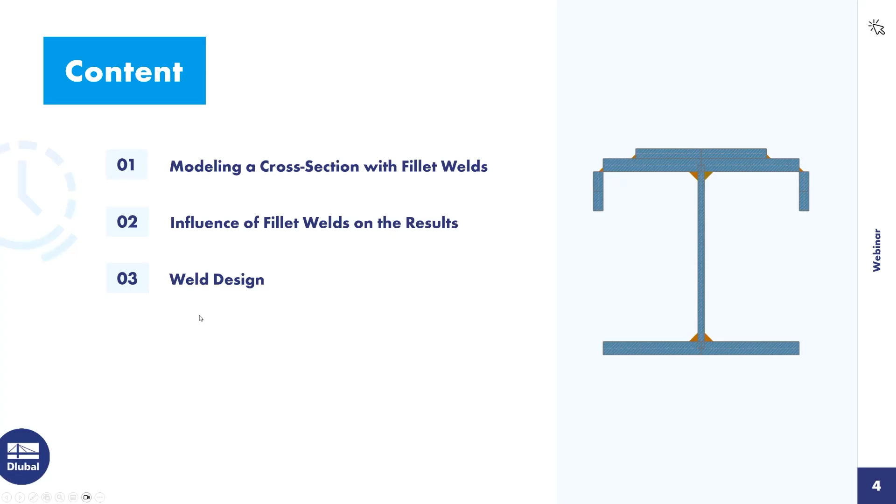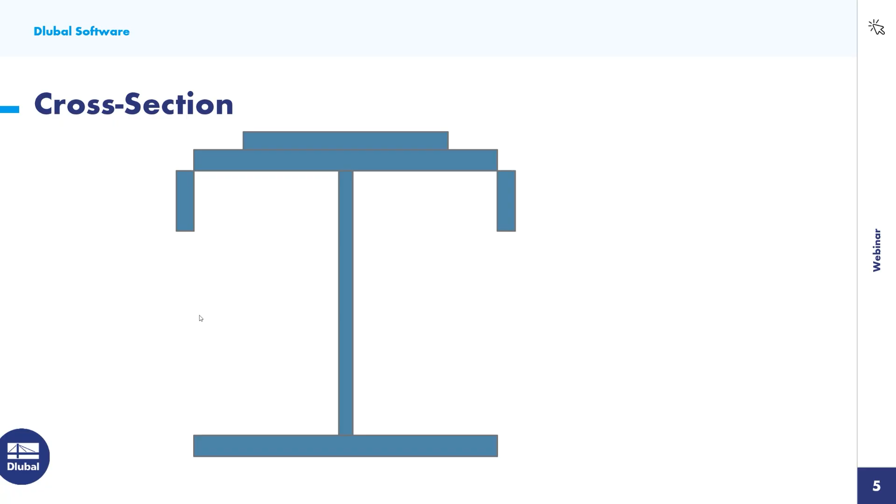The presented cross-section featuring a welded reinforcement and welded lips on the top flange will be modeled in RSECTION. During this process, the types of fillet welds available in the program will be introduced. The throat welds are modeled using a standard fillet weld. The connection between the reinforcement plate and the flange is created using a lap fillet weld, while the lips are attached to the flanges via corner fillet welds.

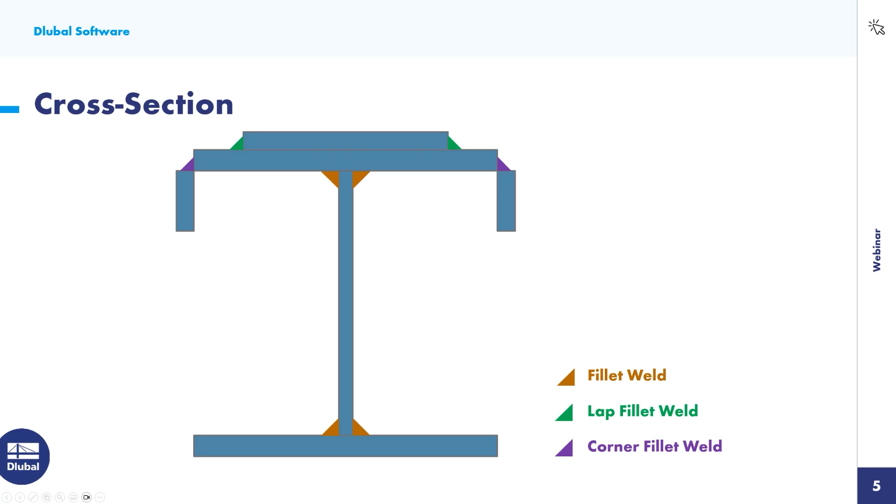To begin, I create a new file in RSECTION. I name this file example1. Since weld stresses can only be calculated using the analysis method thin-wall analysis, I select this option. For the material, I choose steel S235. This material is already inserted in this file, but if you would need another material, you can choose this from the material library.

I insert the cross-section to be modeled from the cross-section library. I use the section type parametric thin walls since this section type allows me to define the parameters of the cross-section manually. For the welded cross-section, I choose also the manufacturing type welded. I then define the dimensions of the cross-section. The height is 300 millimeter, width is 300 millimeter. The thickness of the web is 10 millimeter. The thickness of the flanges is 20 millimeter.

At this point, welds could already be defined, but I deliberately postpone the step in order to demonstrate later how to create welds and what settings must be considered. When inserting the cross-section, I disassemble it into its individual components to allow for further editing. To ensure that the force transfer occurs exclusively via the weld and not through adjacent elements, a separation joint must be defined on the welded element. Let me explain this in more detail.

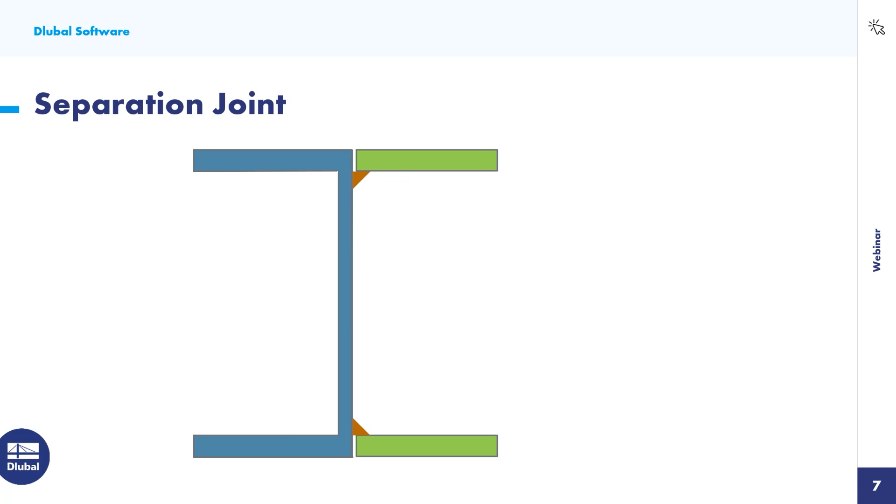In this example, the web is welded to both the top and bottom flanges. In this case, the web is considered the welded element. Therefore, separation joints must be applied at both the beginning and end of the web, in other words, at its connections to the flanges. If, on the other hand, the two right-hand flanges were to be welded to an existing section, the separation joints would need to be defined on the flanges, as they would then be the welded parts. The separation joint is defined directly within the corresponding element.

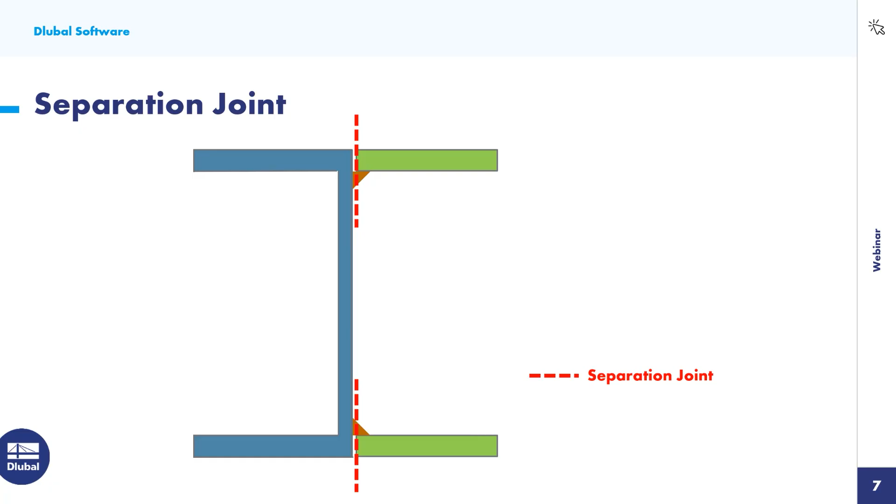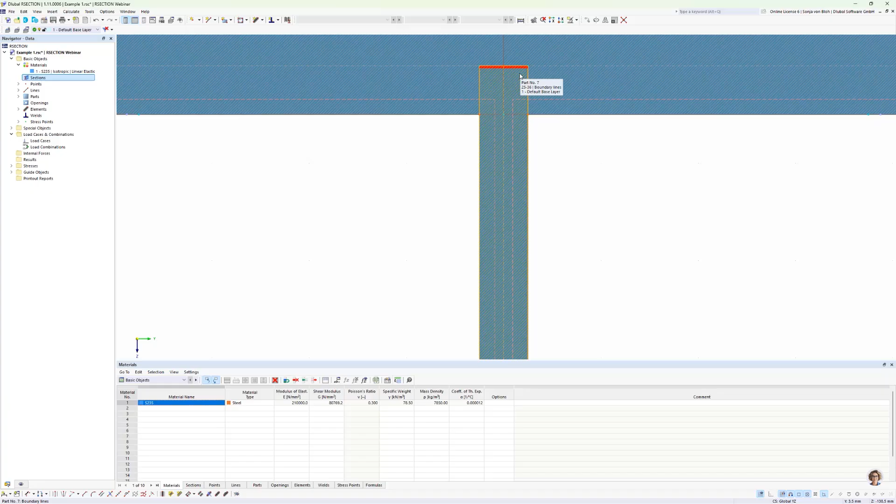In this case, I open the Edit dialog of the web, and here I define the separation joint on start and end of the element. For verification, the separation joint is also shown graphically in the model.

Next, I define the fillet welds. For this, I use the weld type fillet weld. First, I define the throat thickness. This should be 10 millimeter. Then I select the elements to be connected by the welds. These are the upper flanges to the web and the lower flanges to the web.

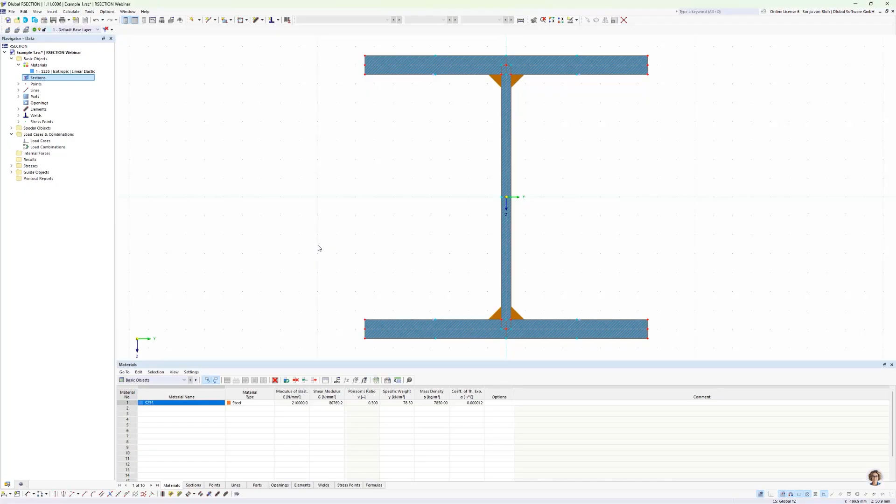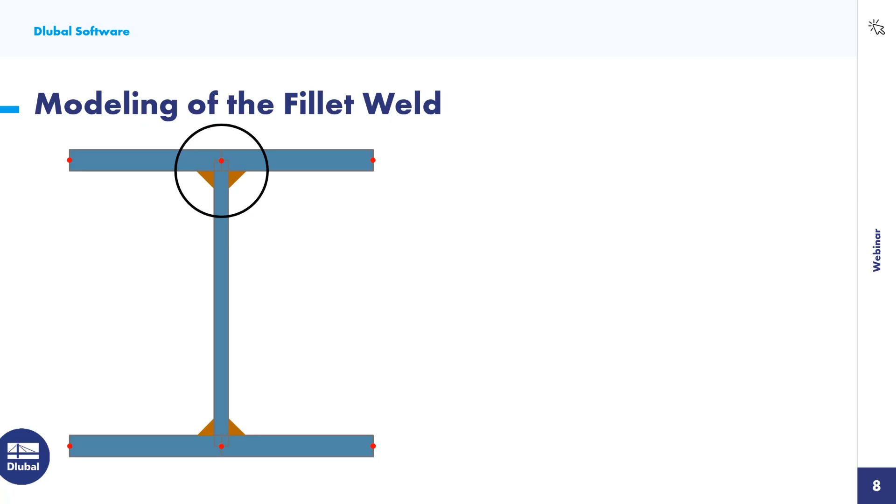The connection between the flange and the web is made via the fillet welds. I would now like to show in detail how these welds are represented. To do this, I examine the connection between the web and the top flange. The previously defined separation joint on the web ensures that there is no direct connection between the web and flange. Force transmission takes place exclusively through the welds.

The program generates the connection elements shown in green, which represent the fillet weld. This configuration results in a closed cell, which leads to a Bredt torsional moment of inertia being taken into account in the cross-section properties. The welds have a noticeable effect on the stress distribution.

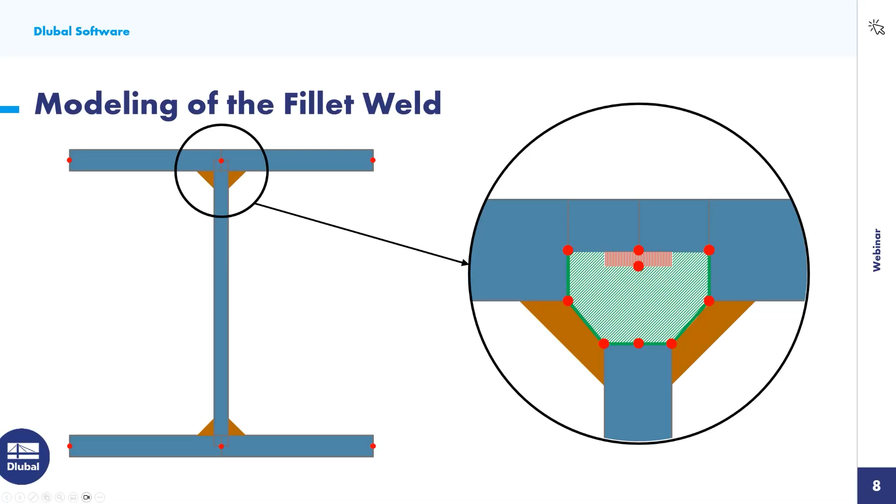For comparison, I create an additional file with identical cross-section but without welds. I name this file example2. I choose here once again the analysis method, thin-wall analysis. I use the material S235 and I define the I section with the help of the cross-section library.

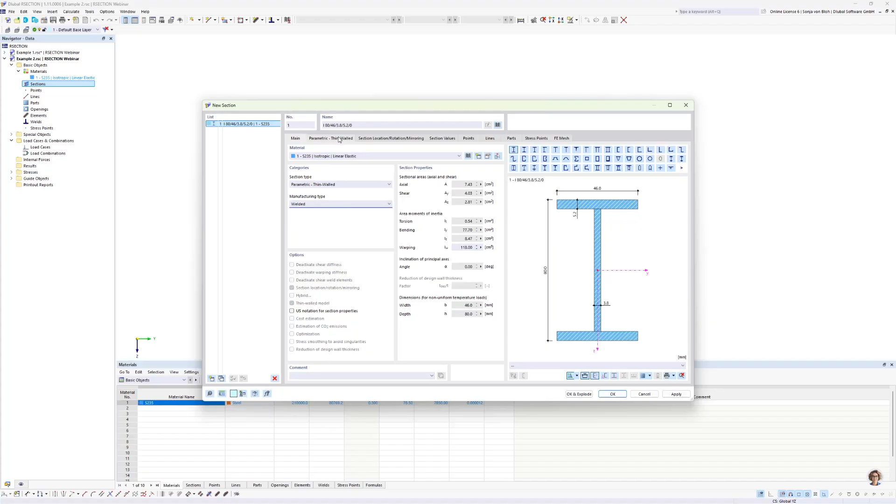Here I choose the section type parametric thin-walled, the manufacturing type welded, and I define the dimensions of the cross-section: height 300 millimeter, width 300 millimeter, thickness of the web 10 millimeter, thickness of the flanges 20 millimeter. I insert the cross-section with OK and explode.

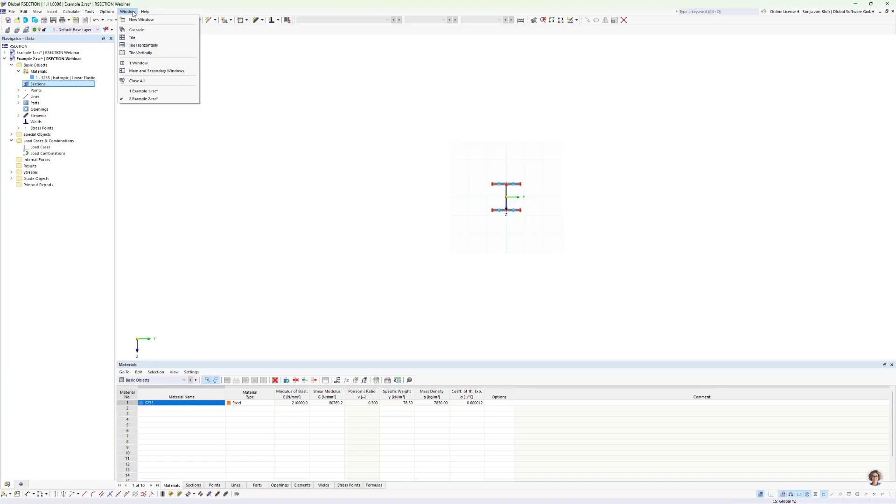To directly compare the cross-section properties and stresses, I display both models side by side, and for this I use here this function, tile vertically. Then I start the calculation in both files.

As already explained, the torsional constant in the file with weld is higher because of the additionally considered Bredt torsional moment of inertia. Here I have a torsional constant of 195, and in the file without welds I have a torsional constant of 162. I then compare the unit shear stresses due to torsion.

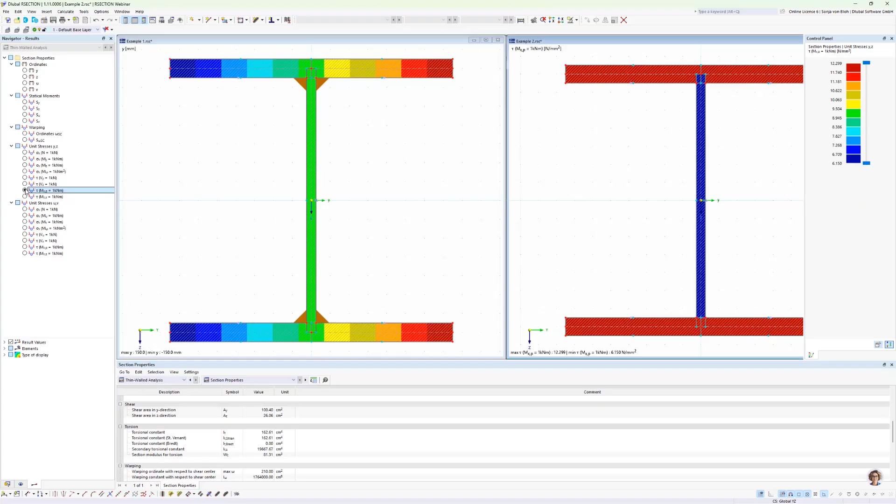For this, I activate here the unit shear stresses in both files, and I choose here the type of display off, and also in this file. In the region of the closed cell, due to the welds, higher torsional shear stresses are observed in the welded section, while lower stresses occur in the remaining areas of the cross-section.

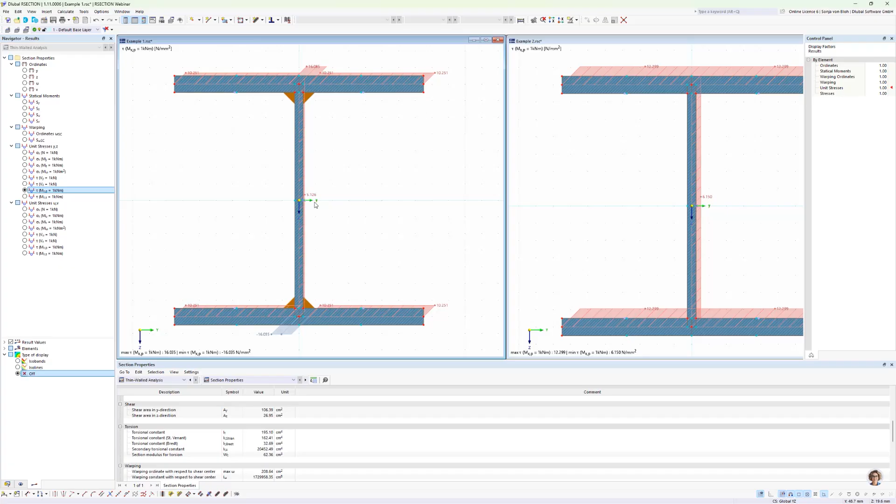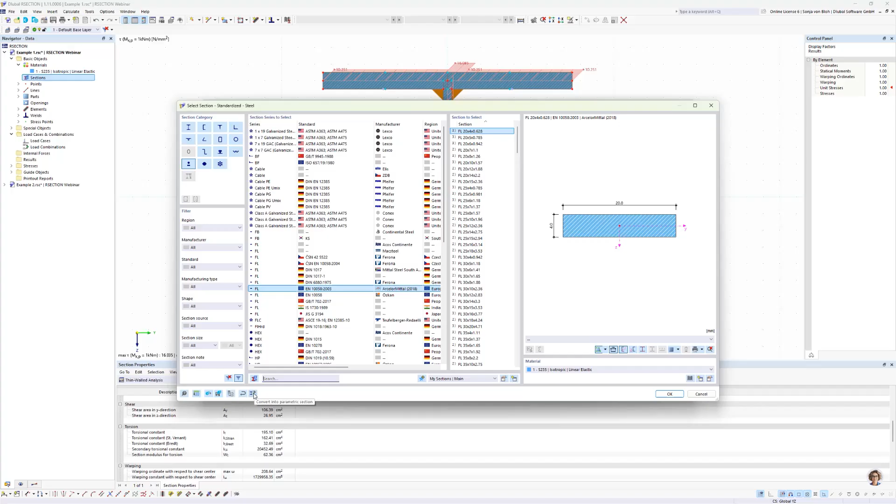To further reinforce the I section, a flat steel bar is welded to the top side of the flange. I select a flat steel profile from the section library. For this, I open the navigator data and insert a new section, a flat bar. I want to define the dimensions manually, and I want to define here a width of 200 millimeter and a height of 50 millimeter.

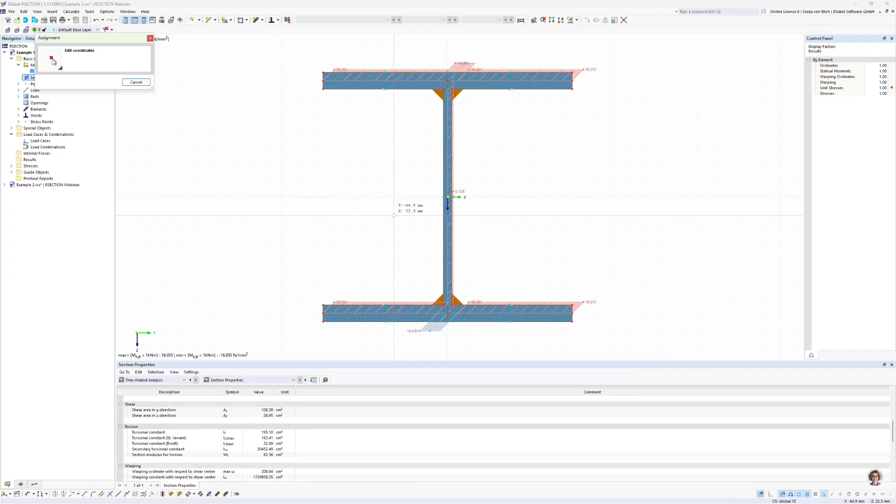In the graphic preview, I set the center of the bottom edge of the flat steel as the reference point. I then select the insertion point in the working window, which corresponds to the center of the top flange. After confirming with OK and explode, the flat steel bar is placed centrally on the top of the flange.

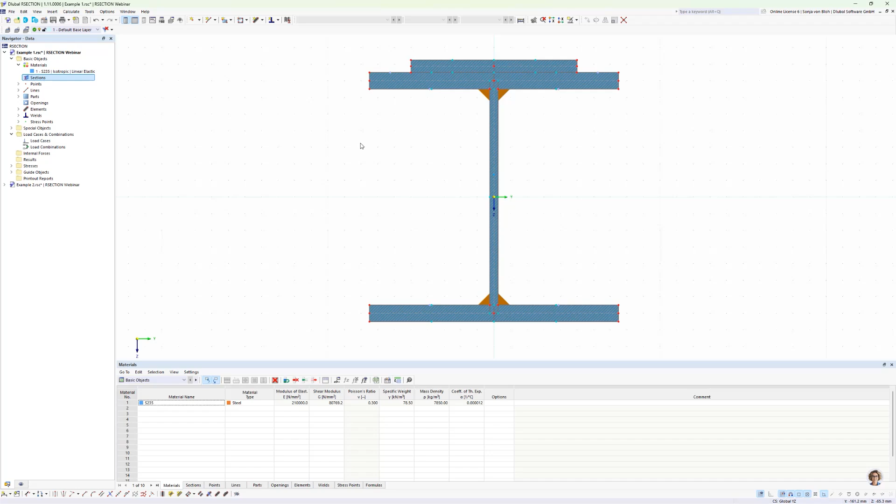The connection between the flange and the reinforcement is made via a lap fillet weld. This type of weld provides a direct connection between both components, making additional connection elements unnecessary. Lap fillet welds are suitable for elements that run parallel to each other and make contact at least at one point. So I open the lap fillet weld dialog, and here I define first the throat thickness of 5 millimeter.

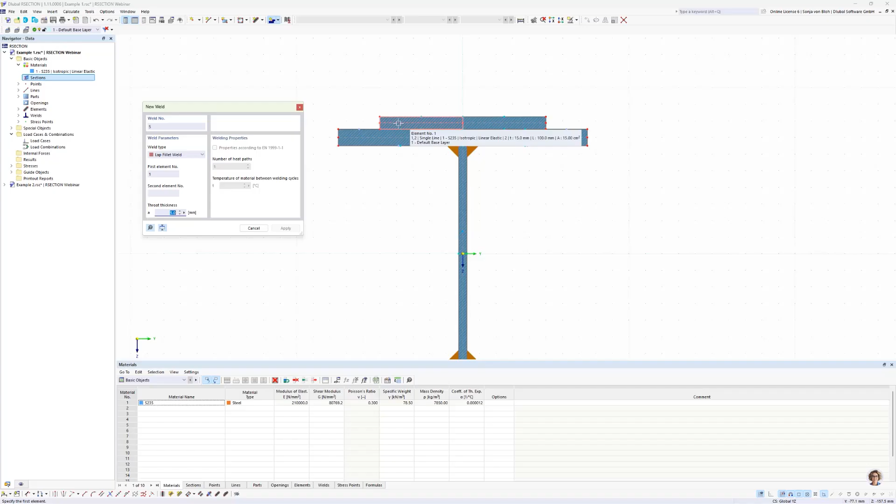The first element to be selected is always the one whose front face the weld will be applied to. And this is here, this element on the top. As soon as the mouse hovers over the second element, a preview of the weld appears in the working window. Clicking on the second element completes the creation of the welds. On the right-hand side, I do the same.

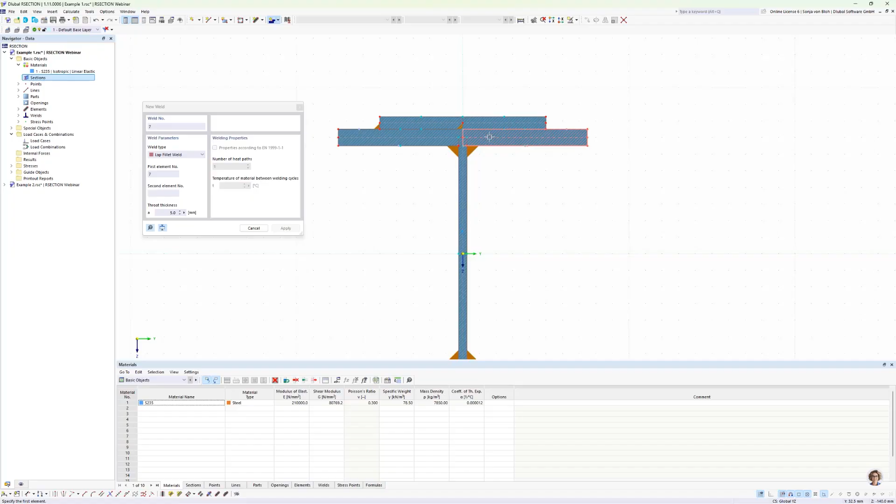But I see here that the weld is not placed as intended. This is due to the graphical input method, where the first weld is automatically placed at the start. Only a second fillet weld on the same element would be generated at the element's end. To correct the weld's position, the orientation of the first element can be reversed. I will do this here in this file. I select here reverse element orientation, and now the weld is in the correct location.

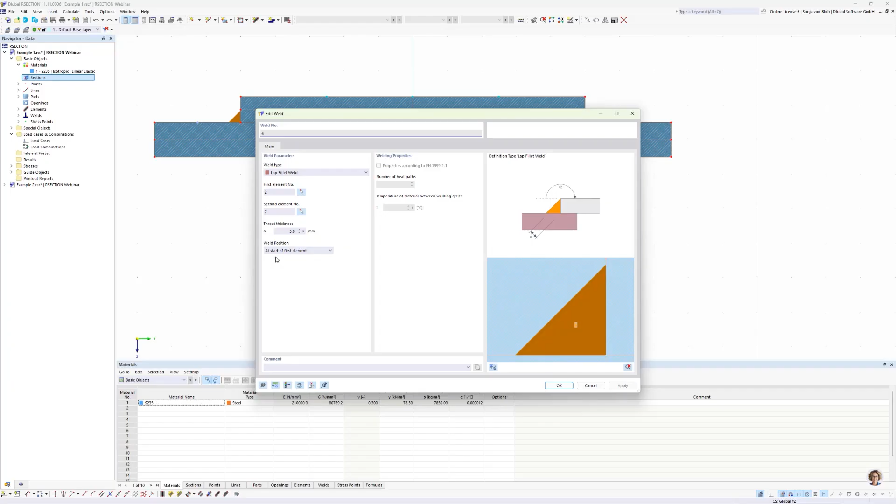You have an alternative way to do this. For this, I undo this action. You also have the possibility to define the position in the weld dialog, and here you can choose the weld position at end of first element.

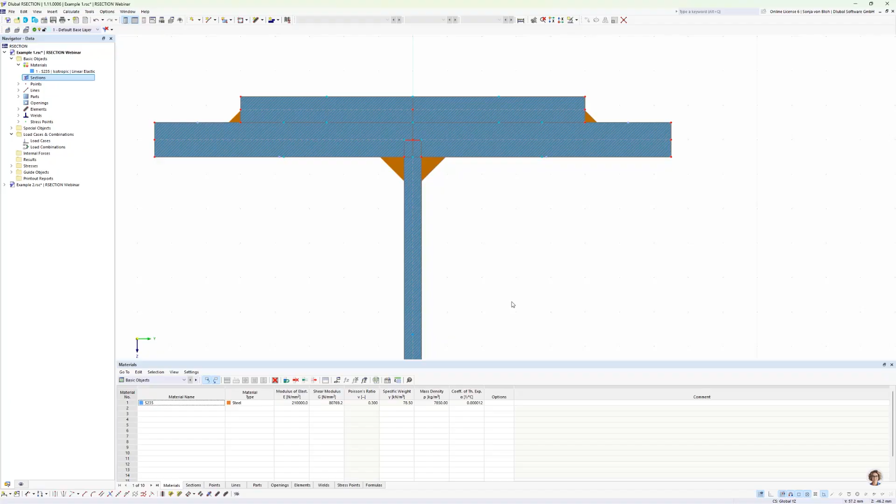To further reinforce the top flange, additional lips are welded to the sides. For this, I select a flat steel profile from the section library. So I open the section library again. I choose here bar sections, convert into parametric section, and then I define here the width. And the width should be 60 millimeter and the height 15 millimeter.

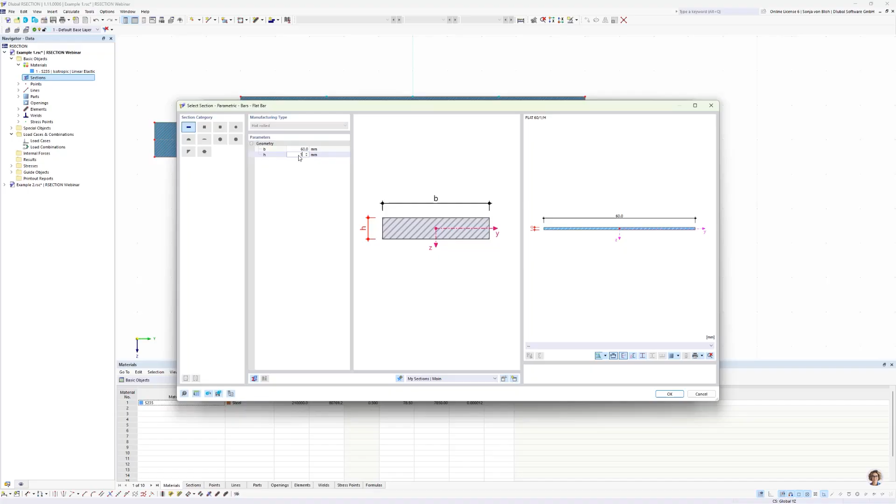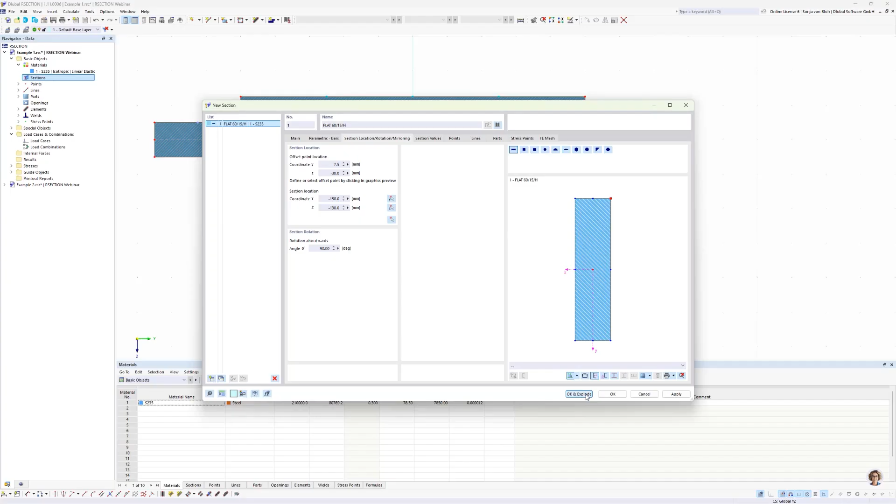I have now to rotate this cross section, and I do this in the step section location rotation mirroring, and I define here the rotation about x-axis, about 90 degrees. In the graphic preview, I set the upper right corner of the profile as the reference point. So I click here on this point with the mouse. The insertion point is then selected as the lower left corner of the top flange in the working window. And the cross section will be inserted with OK and explode.

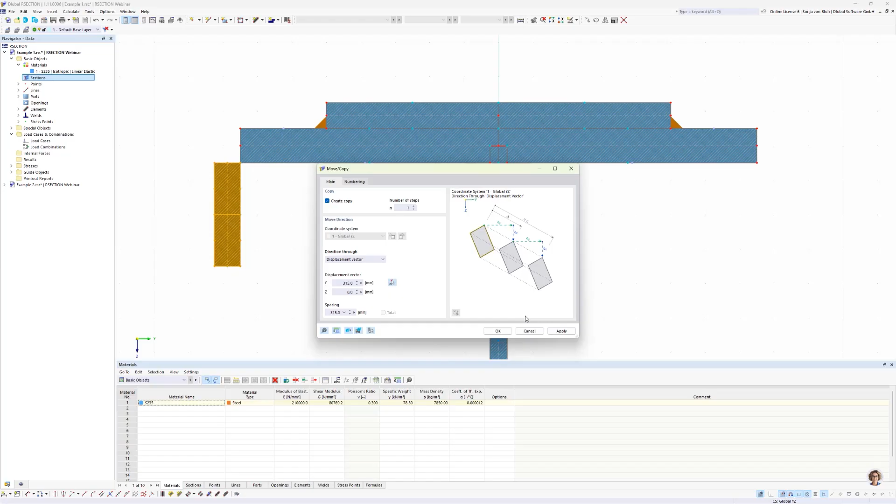The inserted lip is then copied to the right-hand side. To do this, I select the component, and then I choose the Move Copy command. In the dialog that opens, I activate the checkbox Create Copy, and then I define the displacement vector. And click on OK. The connection of these parts is made directly using a corner fillet weld, meaning no additional connection elements are required. The only requirement is that the elements must touch at least one point.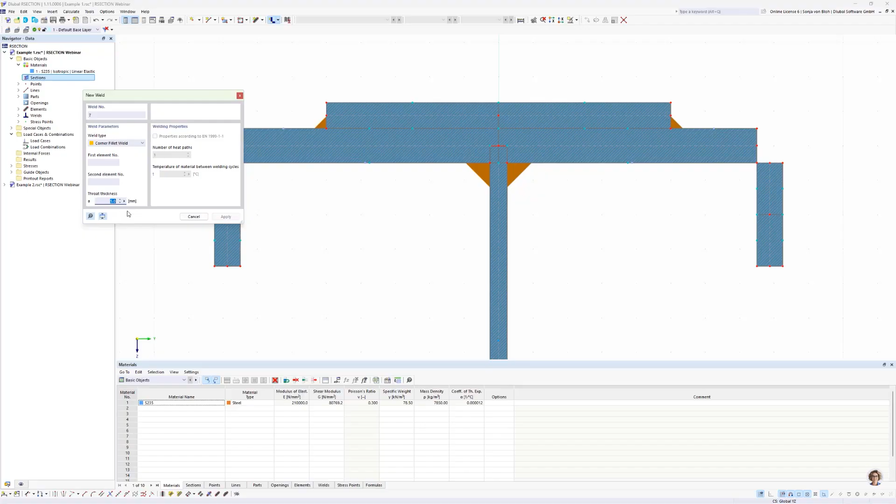So I open here the corner fillet weld dialog. I define a throat thickness of 5 millimeter, and then I select the elements to be connected. The elements are selected one after the other using the mouse. The order of the selection does not matter. So I select here these elements. The welded cross-section is now fully modeled.

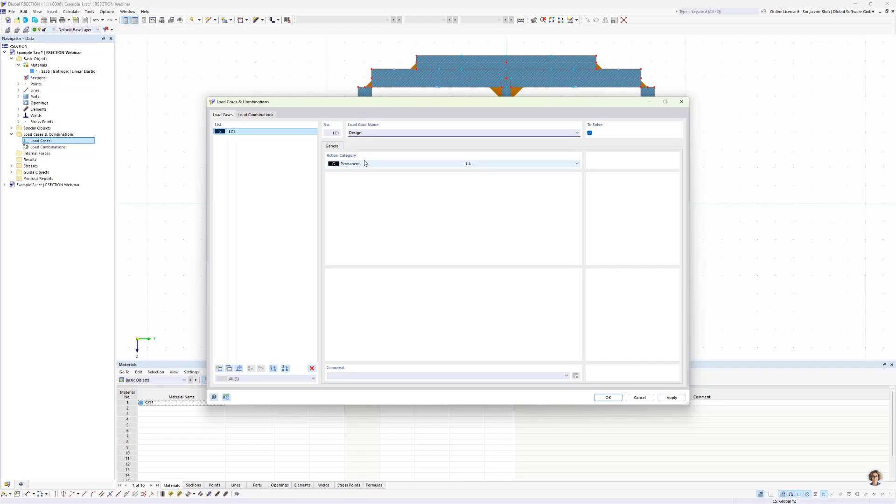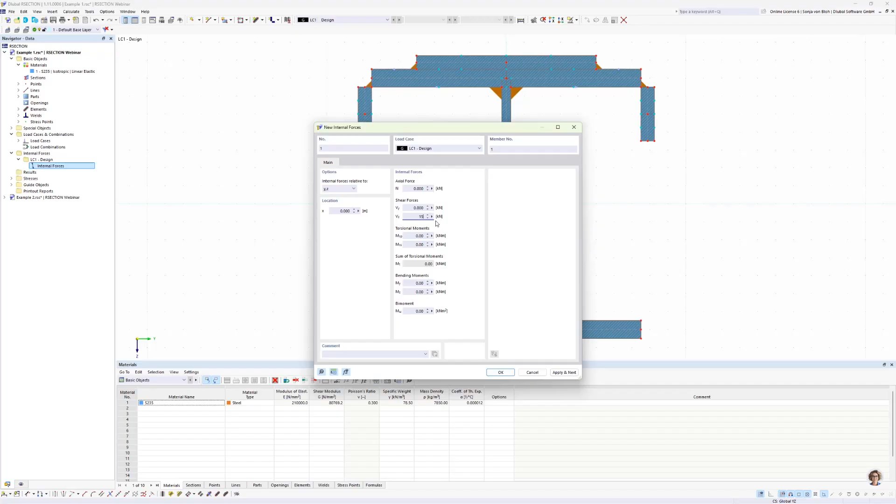The next step is to perform the weld stress checks. For this, a new load case must be defined. So, in the navigator data, I create a new load case and I define the load case name design. Within this load case, I define the relevant internal forces. So I open here in this load case the internal forces dialog, and I specify a shear force about 150 kilonewton.

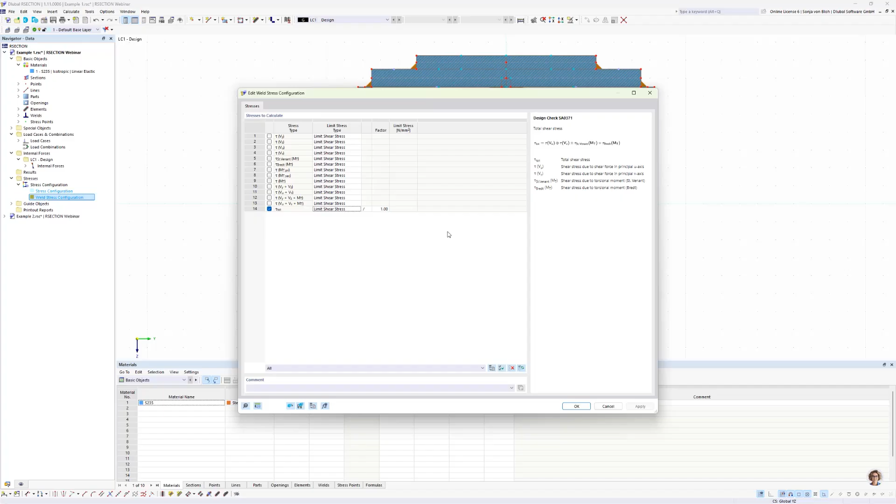The selection of the weld stress components to be calculated is done in the weld stress configuration dialog. You find this dialog via the navigator data, here under stresses, stress configuration, weld stress configuration. Here you can choose the stresses to calculate, and here it's also possible to define the limit stress types. The limit shear stress is calculated automatically, but it's also possible to define the limit shear stress user-defined. I leave the default settings unchanged, so I click here on OK. I then start the calculation.

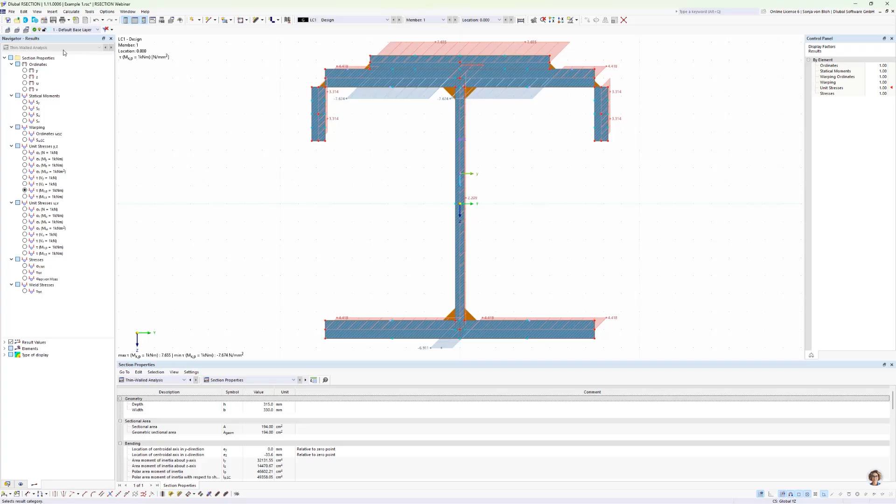The weld stress results are displayed both graphically and in tabular form. The graphical results are located in the navigator results under weld stresses, and here I have to use the type of display isobands, and then you see here in the stresses directly the weld stress values. The tabular results can be found as a subtable under thin-walled analysis. So it's here this subtable weld stresses. This table includes the calculated stresses, the allowable limit stresses, and the resulting stress ratio.

With that, all steps for modeling the welded cross-section and performing the weld stress design in RSECTION are complete.